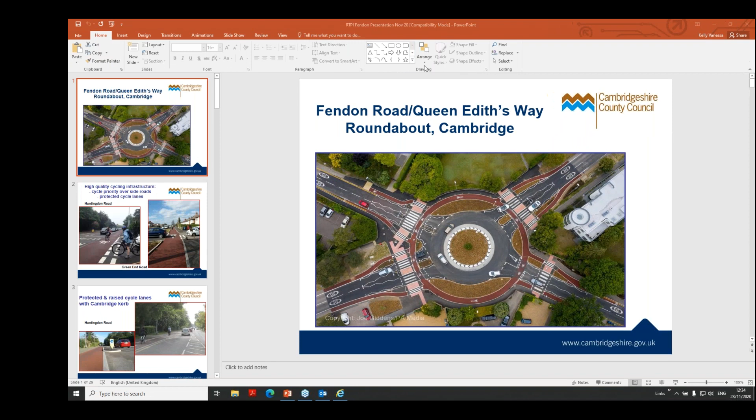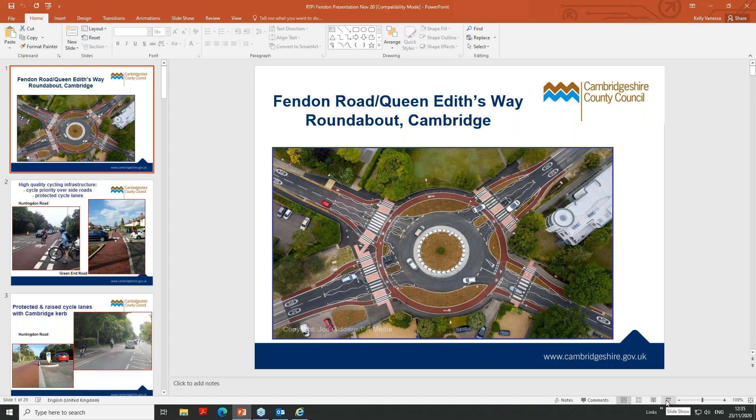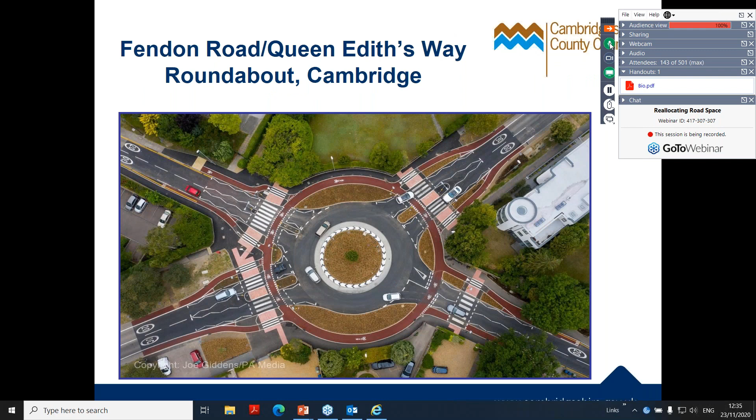Okay, hello everybody. Well, let me just sort out my screen. It's not happening. Let me just, sorry, be with you in a moment. Right, are we ready to go? Is everything okay? Yeah, good to go.

Great, okay. Hi, everybody. There's the roundabout, Fendon Road roundabout from the air.

And oh, I don't seem to be able to. Yeah, mine doesn't seem to be working. Sorry. I just thought. Sorry, the slideshow doesn't seem to be working for me. I don't know why it isn't working. If you just come out of your presentation, Vanessa, and click back into it, it might help you click through. Okay. Sorry about this. Eating away into the time of the thing. Okay, let me just turn that off for a second. I don't seem to be able to get out of it now. So basically everything's frozen for me. Okay.

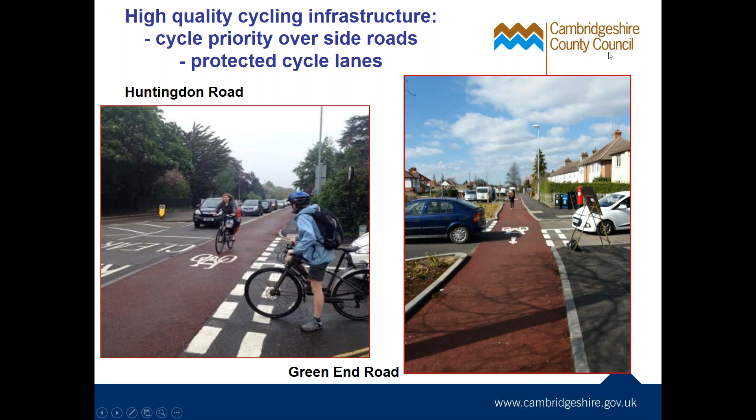Okay, I seem to have got on to the next. I think I'm having problems with my laptop freezing, which is to be expected since it's a bit of council rubbish. I'll try and get going now, okay? Hopefully it'll ease up now.

I wanted to give you a bit of background to the infrastructure we've been delivering in Cambridge. So in 2013, the cycling projects team received Cycle City Ambition funding, got two tranches of it. The funding was conditional on delivering high quality cycling infrastructure and monitoring the schemes before and after. And then in 2015, working for the Greater Cambridge Partnership, we received further funding to improve key commuter routes. You can see examples of this on the screen at the moment.

So cycle priority over side roads, and also separating cyclists from the carriageway, either fully where there was the width to do so, which we had on Green End Road on the right there, or by height when widths were constrained and we raised the cycle lane.

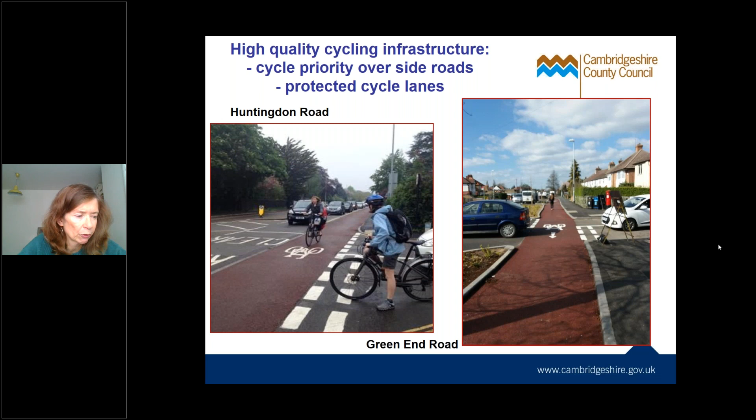Okay, it's working now, good.

So we saw this new funding as an opportunity to be innovative, and the team leader, Grant Weller, and I came up with new designs for curbs. So we used these on Huntingdon Road initially. You can see the Cambridge kerb on the left there, which is a sort of sloping curb that cyclists can leave and enter the cycle lane when they want to. And that's an example of it there on the right on Huntingdon Road.

Advanced cycle green signals were something that came pretty early to Cambridge. We've got them at a number of junctions. And we also introduced side-by-side cycle symbols. So it indicates to cyclists when it's safe to overtake, but also you can ride side-by-side because cycling should be a sociable activity.

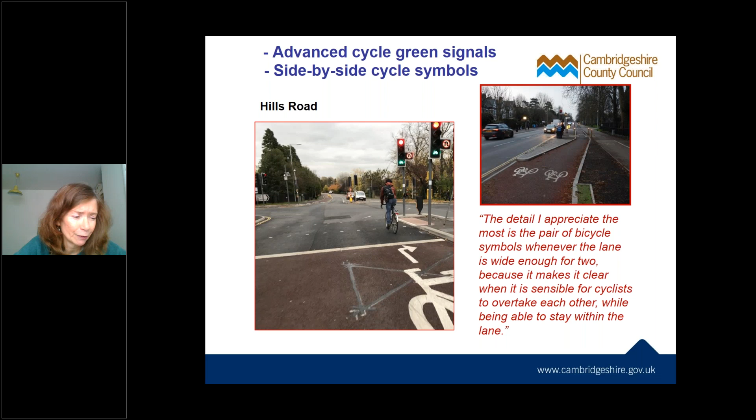And in 2014, the Cycling Projects team delivered a sort of Dutch light roundabout. So it's got the same deflection for drivers as they go around the roundabout. You've really got to slow down, narrow carriageway. But instead of having proper crossings, there are uncontrolled crossing points from shared use paths. So that's not as the Dutch would do it. But as we've seen, this design has certainly reduced accidents quite a bit.

So all in all, we feel that the changes that we've brought about in Cambridge in recent years, the reallocation of road space, for example, on Hills Road, one of the big arterial routes in and out of the city, you've now got 3-metre wide traffic lanes and 2.3-metre wide cycle lanes. So drivers have got to adjust to a different streetscape, one where they have to be more cautious because they don't have a nice wide road to drive along. And it was all these things building up that made us think, well, maybe now is the time for a Dutch style roundabout.

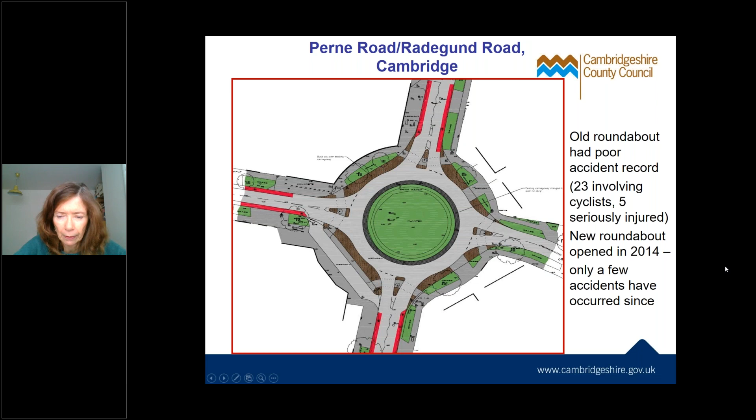Oh look, it's frozen again. Oh, good. Good. Really sorry about this, people. Come on. Okay. Some miracle that happened.

And the poor provision for pedestrians and cyclists along this road has been a long-standing issue. And so local councillors secured some S106 funding to be allocated to improve the infrastructure along there.

And it's stuck again. Okay.

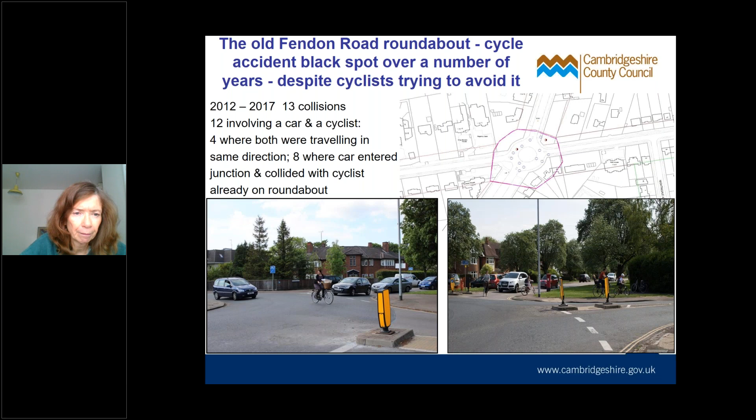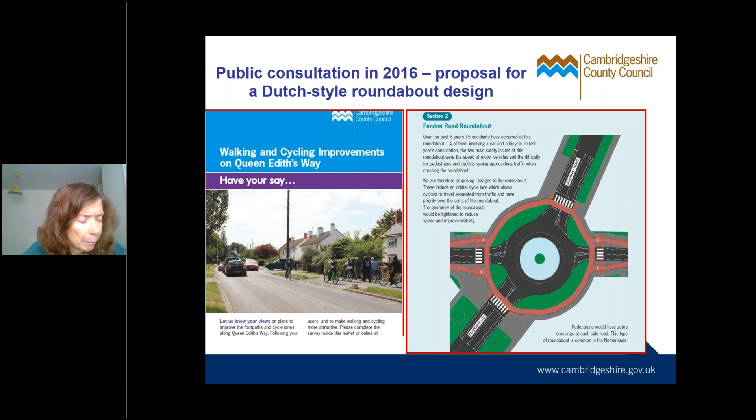So the following year, we had a sort of bigger public consultation with actual proposals. These proposals came out of a stakeholder workshop we'd held in March. And we then proposed the options over the summer. So this is a bit more of a close-up of the consultation drawing. You can see that it's got deflection around the central island, narrow lanes, and an orbital cycle lane. But the cyclists approach each of the crossings at a bit of an angle rather than straight on. So that means they don't have such good visibility of oncoming vehicles. And also on Fendon Road and Mowbray Road, the north and south arms, there's no provision for cyclists exiting, and you don't have islands in the middle of the road either.

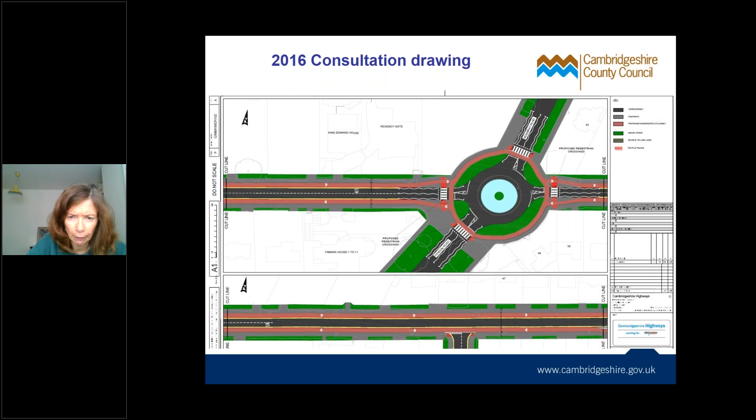So all in all, we got pretty good support for the Dutch style roundabout, with 433 respondents strongly supporting or supporting, as opposed to 115 opposed or strongly opposed. We received approval to move to the detailed design stage and construct the roundabout in November 2016. We've still got some work to do on the rest of Queen Edith's Way. But not long after we got the approval, we were contacted by the Dutch consultancy firm Royal Haskoning. They offered to do the preliminary designs for free in return for some publicity. And it was certainly one of the best decisions we ever made, because we could really draw on a high level of expertise where the design was concerned.

So you can see the changes that they brought about to the design. The cyclists are now approaching each arm straight on. There's greater deflection for vehicles around the central island. There are central islands on Fendon Road and Mowbray. And also on the eastern arm, you can see that they've separated the cycle crossing from the zebra crossing, because there's a private driveway, there's an access between there.

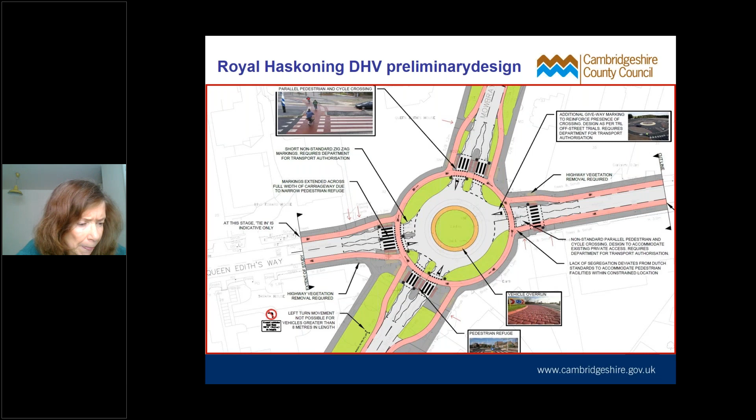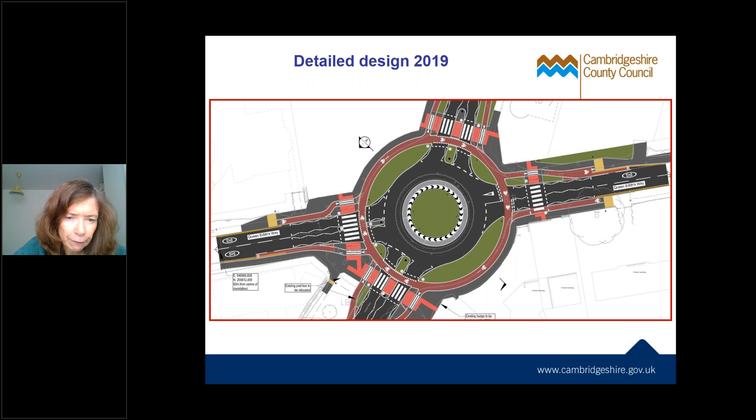So we then moved towards the detailed design, close up of that. And this was refined further by Skanska. And the Department for Transport accepted that we needed to separate the crossing from the cycle crossing on that eastern arm, so that was good. They did let us have give way triangles on every arm apart from that separate one. And we've now introduced mini zebras over the cycle lanes, which was something residents and local councillors certainly wanted us to do.

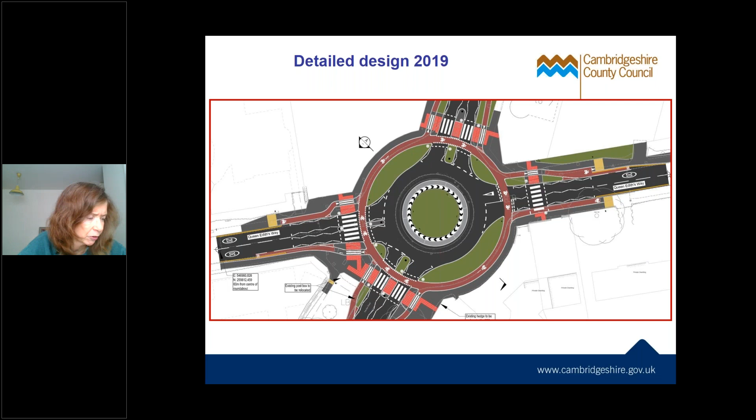When it came to signage, we felt that the signage that we'd had on the parallel crossing on Huntingdon Road was a bit underwhelming. It's legal, but doesn't really stand out. We wanted signage which packed a punch and left drivers in no doubt as to what they were expected to do at this brand new roundabout. We came up with the signage on the right. It took the DfT a long time to come back to us and tell us that basically we couldn't have it. The message shouldn't have been cyclists and pedestrians have priority. It should have been give way to pedestrians and cyclists. And even this was unnecessary, because that apparently is what parallel crossings mean, even if drivers aren't actually aware of it.

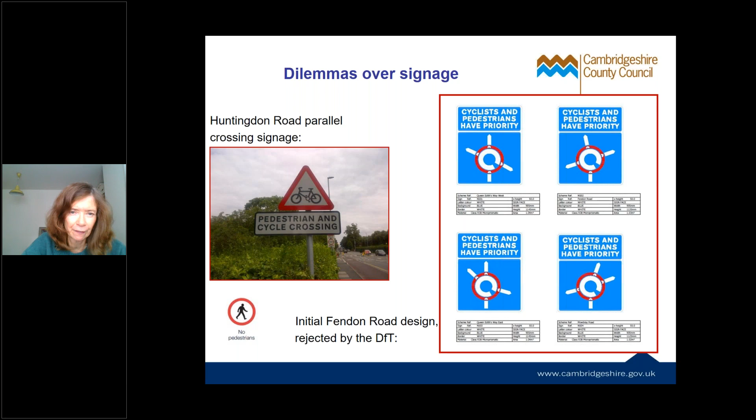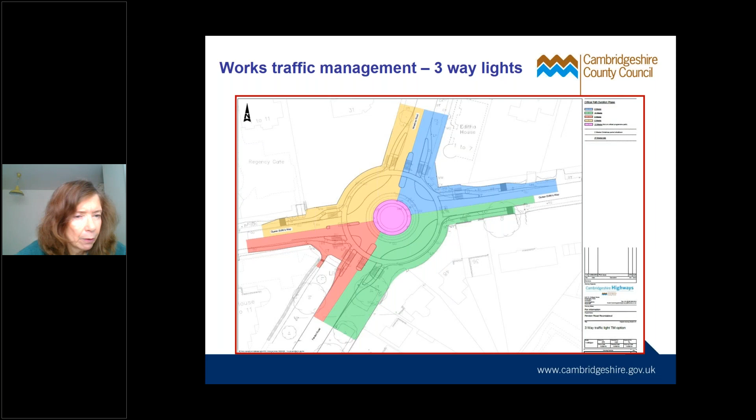So works began on the construction in September 2019. The works were carried out in quarters, as you can see there, and the west arm of Queen Edith's Way was closed, and then we had 2- or 3-way lights on the other arms. A lot of construction issues. You can see in that photo what we had to face.

We weren't allowed to cut those roots because they belonged to a tree growing in a private garden. There was a proper spaghetti junction of pipes and cables under the roundabout. There's even a military cable which we weren't allowed to know the location of. And a lot of this became obvious once we opened the road up. You know, the trial holes just didn't show the extent of the rerouting and diverting that would be needed.

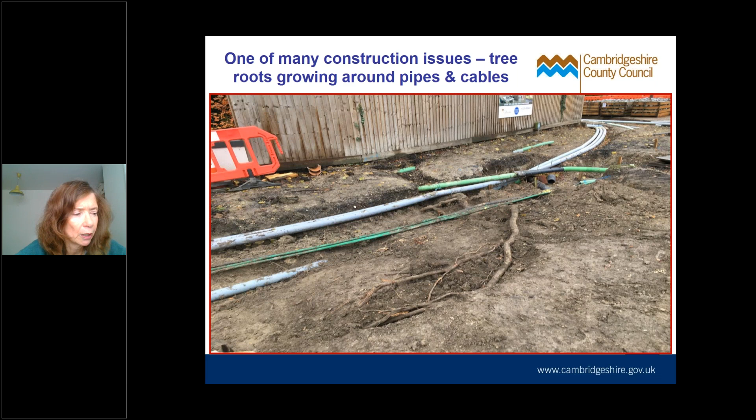In the end, we installed 700 meters of new ducting, and we removed another 200 meters of ducting. Our contractors worked collaboratively with the utility companies on site, but this did impact on the program and the budget. And of course, that first lockdown in the spring, when our contractors did not work for 6 weeks, also obviously affected both the program and the budget.

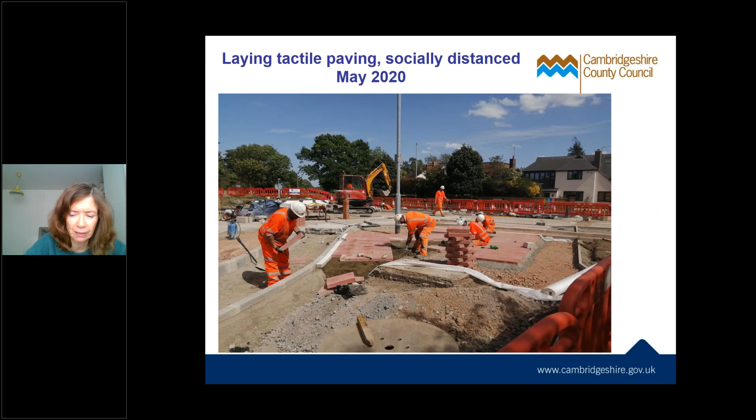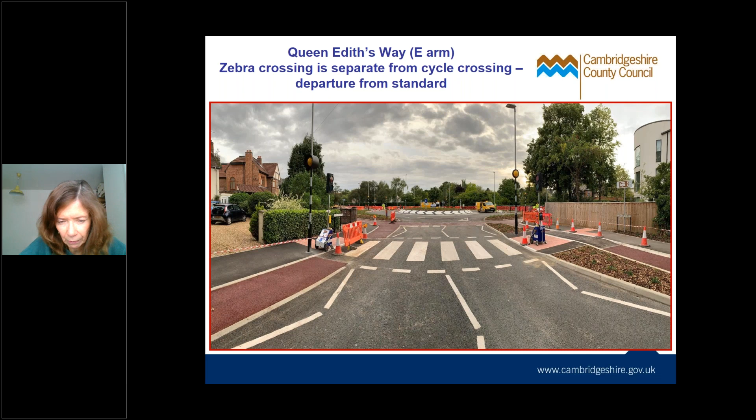But once the utility works were completed, the pace picked up. You can see tactile paving being laid here. And then in late spring, the roundabout was really starting to take shape. You can see the mini zebras there. And then this is the eastern arm with the sort of separate zebra and cycle crossing.

We used a special sort of French gully, which you can see on the right there, which is cycle friendly, good for a constrained location, and should prevent flooding and other issues on the cycle lanes. We reduced the speed limit on the approaches to the roundabout to send a signal to drivers, but unfortunately it was a signal that the night before the official opening, a driver must have missed because he did a hit and run on one of the Belisha beacons.

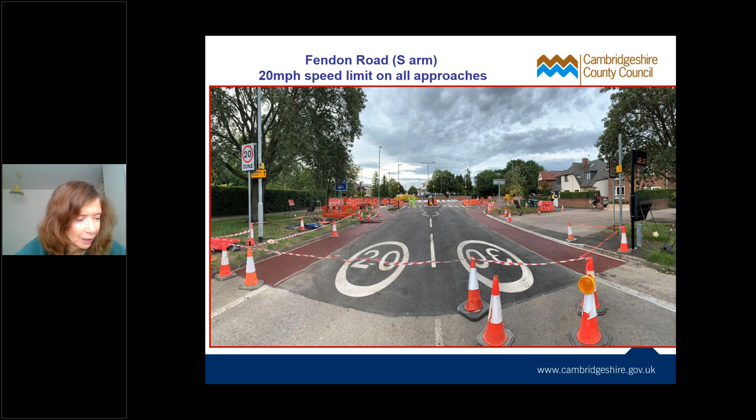So we felt it was really important as we approached the opening of the roundabout to get the message out about how different it was. We produced a video, a safety video that showed how to use the roundabout as a cyclist, a pedestrian and a driver. And the main message was slow down and look out for each other. And in the case of drivers, give way. The video was sent out to everyone we could think of, really, and it was certainly picked up by the local and the national media.

It has been a really difficult scheme to deliver. There was a lot of opposition from a small number of local residents, and their main argument was that evidence from Holland showed that there were more accidents at these roundabouts where cyclists had priority than at those where they didn't. The Dutch acknowledge this, but they argue in favour of cyclist priority because it enables mobility and therefore encourages cycling. And this sort of roundabout design is also much safer than a signalised junction, which does feel counterintuitive, but the Dutch have been replacing signalised junctions with these roundabouts for many years now.

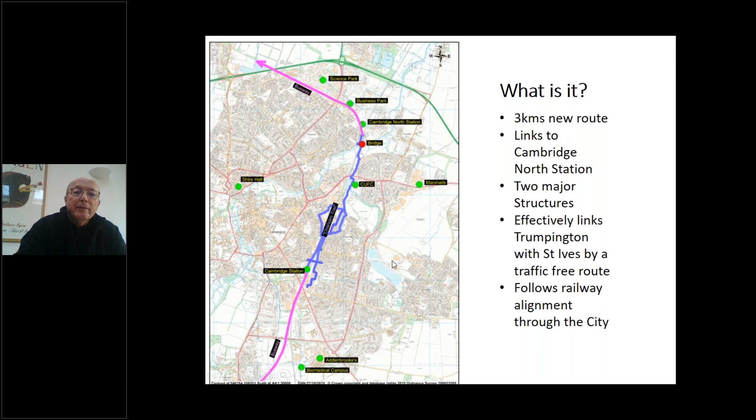In fact, it actually links Trumpington to the south with St Ives in the north, which is about 18 miles. So it's actually a very long strategic route. There's 2 major structures in it, and it follows the railway alignment. I don't know whether you can see my cursor. Anyway, it follows the railway alignment, which is basically north to south.

Something about the history of it. This picture is Jim Chisholm himself. So the name has got nothing to do with cattle droving in the United States. It's named after this chap who dreamt up the scheme perhaps 20 years ago, when he identified an opportunity around the Coldham's Lane railway bridge, which has some spare arches, and he felt that he could drive a traffic-free route for cycling and pedestrians between north and south of Cambridge without interacting with heavy traffic.

It's been widely promoted by the cycling campaign, Cam Cycle, and over the years it's sort of been shoehorned into county policy and found its way into the City Council's local plan and secured funding along the way, and general widespread approval by the public and councillors. So it's actually a very popular scheme, and we've got Jim Chisholm to thank for it.

But why are we doing it? There's an element of because we can. There's opportunities along the railway, the axis of the railway corridor. There's space, there's a bridge that we can use, spare arches.

But the driver really is the fantastic amount of growth that's going on in Cambridge, generally Greater Cambridge, where you've got new developments of housing to the north, you've got large employers to the south, and it's about getting people to their places of work and education in a car-free way. And like I say, it's because we can. We don't want them in their cars. They already use a bicycle, and we want to encourage that some more.

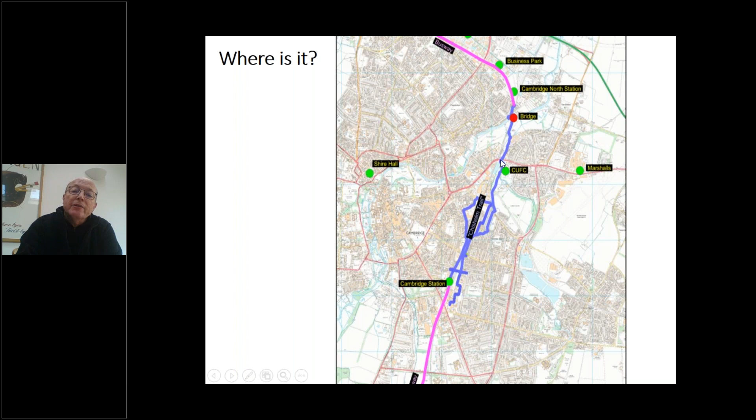Phase 1 is mostly off-road. So this here is through meadowland, and this here is again a sort of secluded green space and a common here where there's a path through it. Like I say, this is largely through areas of housing and on highway. So this bit required planning consent, and this bit very largely doesn't, because it's on highway or the subject of planning applications by Network Rail, and I'll come on to that in a little bit too.

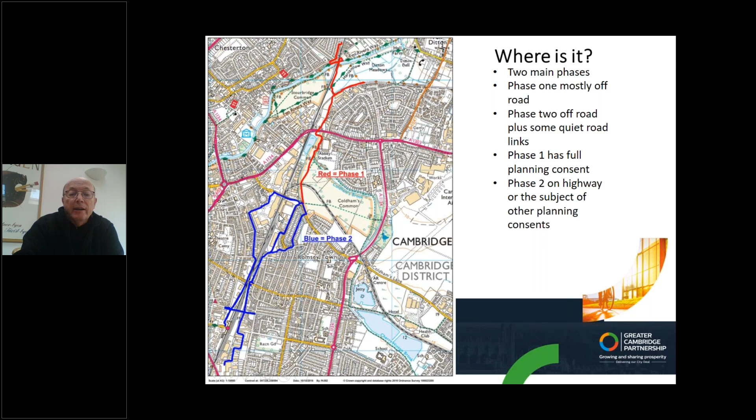So obviously with a scheme like this, what's involved? Clearly a lot of civil engineering. We've got 2 major structures, which I'm going to show you in a bit. Consultation is involved. I think at the last count there were 16 rounds of consultation that we did, which ranged from exhibitions to local liaison fora that we used to run, where we brought interested parties in to give us a hard time through the planning stage, and so they felt that they were involved and had a sense of ownership. We had to go through planning consent, as you might expect.

Because we're going through a common, we had to have Secretary of State approval with Commons consent, and that brings its own challenges. Environment Agency consent, because it's in a floodplain. We crossed the river, so you need a bridge navigation order. Parts of it had to be CPO'd. I have to say not so very much, but we did have to CPO some land to enable the route. And we're adjacent to the railway or within the railway in a lot of it. So there's a whole raft of procedures you have to go through with Network Rail to be able to construct something on their land. I include the train operating companies in that. 15 landowners we had to make deals with to get the route.

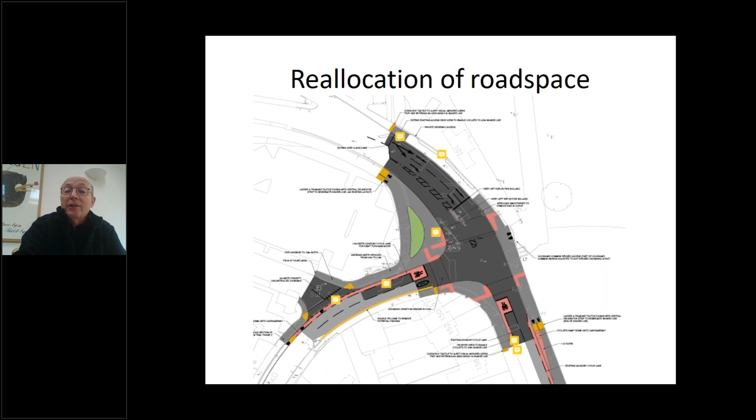So we've taken away from motor vehicles and given back to pedestrians and cyclists. And that's involved a fairly radical, if you know the setup, rearrangement of what goes on at this particular junction. It's not been built yet. It's one of the next things to do in part of our second phase.

Here, a little bit further down, this is a residential street, but it used to serve a very large builders merchants, which is now being redeveloped for housing, even as we speak. There are cranes on the horizon that I can see when I look out of my window. And so when it was in business as a builder's merchant, this road had a lot of heavy goods vehicles going through it. Now it's being redeveloped for housing.

Now we have the opportunity to reallocate the road space in this road, and we'll be narrowing down the carriageway by moving out the curb line and building a 3.5 metre wide path along this axis here. So all this is being taken out, and the new curb line will be here, because it doesn't have to be anything like as wide as it currently is.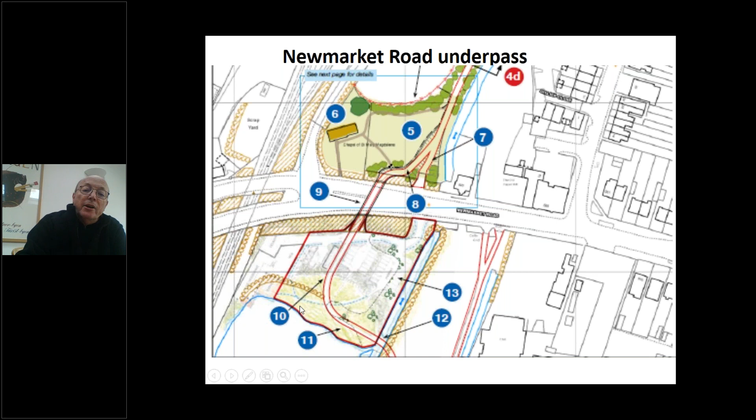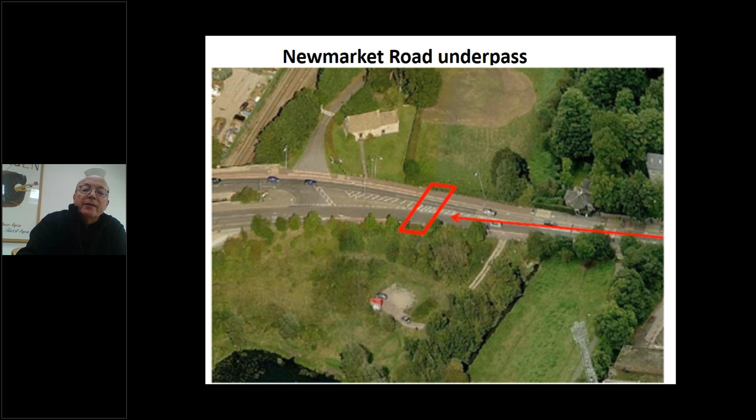Newmarket Road is where we're putting an underpass, just to show you this. On the screen where the 6 is the oldest building in Cambridge, and the red lines show where the Chisholm Trail comes through with an underpass. This is what it looked like before we started work. You can see the Leper Chapel there. This area is a wildlife site and was stuffed with lizards. So that in itself put a huge brake on our being able to work at certain times of year and to have to clear ground and mitigate for the loss of habitat.

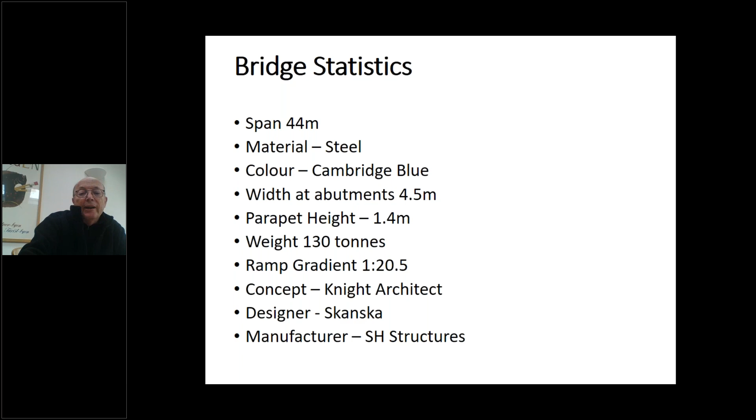We're building a huge bridge. This is some of the stats for the bridge. It's 44 meters long, steel, Cambridge blue. Anyone who lives in Cambridge can go and have a look at it now. It's 4.5 meters wide at its narrowest point, at the abutments. It was a concept design from Knight Architects and made by some very clever people in Yorkshire, SH Structures. There it is, being constructed some time ago now in Sherburn in Elmet by SH.

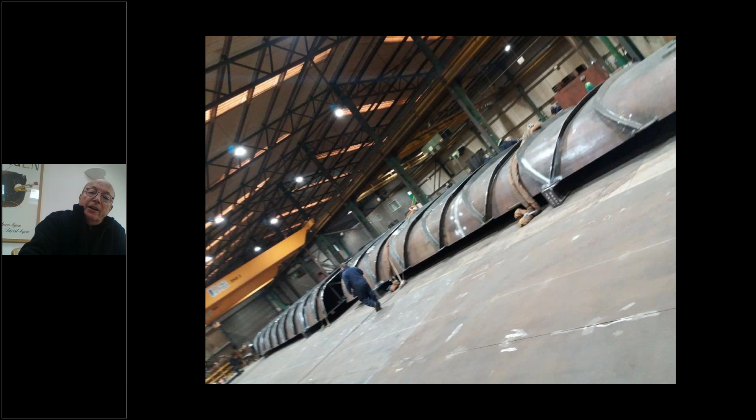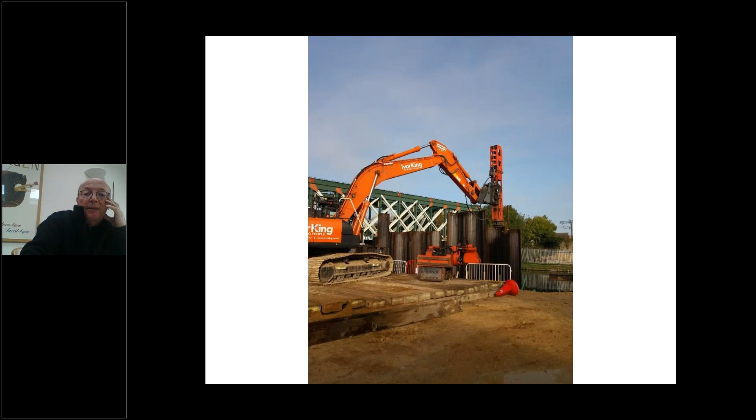And as you can imagine, this is where the bridge is going, and we had to do some quite substantial groundworks before the bridge got put in. Here, these sheet piles support the riverbank. Some of those are 18 meters long because the ground is actually quite similar to porridge in terms of strength. And there is the bridge actually being lifted in. So that's what it looks like. As you can imagine, it weighs 130 tons, so you need some fairly chunky cables to be able to lift it.

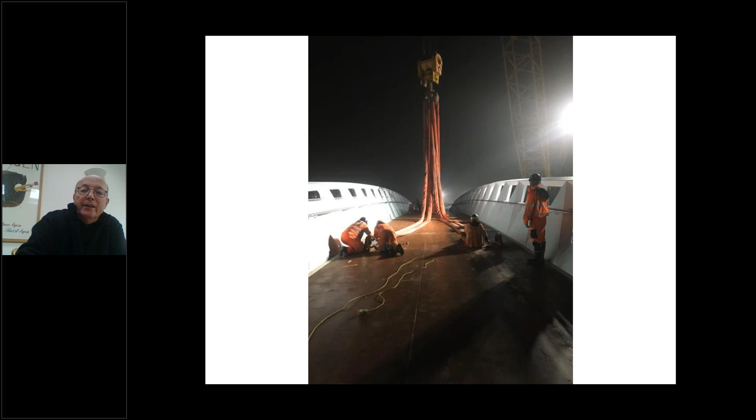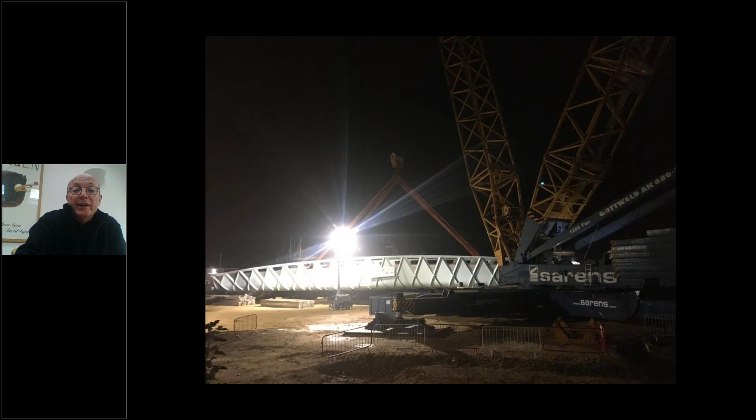And this was happening just a little over a week ago now. This is it being lifted by what is the largest mobile crane in the UK. It's a 1,200 ton crane. It sits on its own piled foundation there, despite being a mobile crane. And there it is, installed in situ, and that's been there now for a little over a week. Broadly, it's been well received by the public. So everyone's itching to use it.

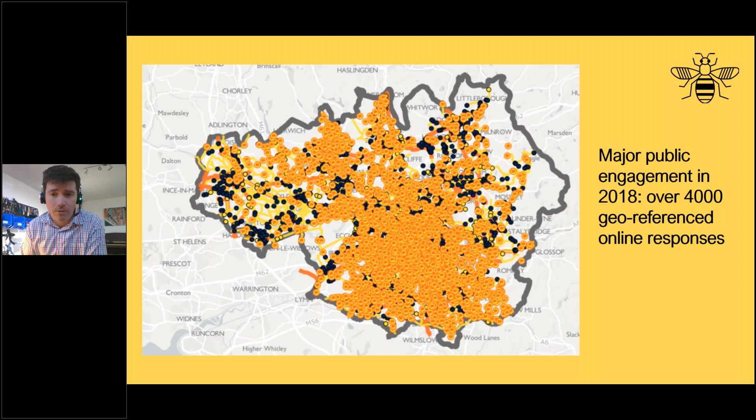And we then pulled all that together and then issued a second version of the Bee Network, taking all that into account in the summer of 2019. And there's some stats there of how big it is, which I won't go into now because I know we're a little short of time.

And I quite like this quote from our Commissioner, Chris Boardman, that at the stage where we were putting this together, it was about what's needed, not about what's possible. We were very clear that the possible bit was our job later. What we wanted to get out of this was what was needed in terms of a network to get people walking and cycling. And the possible bit would come later.

And then in terms of delivery and what it's going to look like on the ground, we've earmarked three main types of infrastructure. And the majority of the network will be on existing quiet streets, or indeed traffic-free routes, generally less than 4,000 vehicles a day, and joining up the crossing points, which I showed you on the map previously.

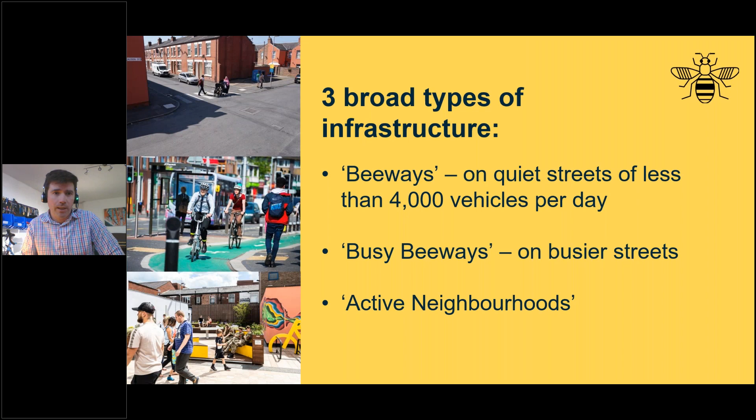A number of busy Beeways will also be in there, which is where a road has greater than 4,000 vehicles a day, and therefore to provide a high quality cycling level of service, you'll need protected infrastructure, as you can see in that picture there in the middle. And then the third type of infrastructure is around active neighbourhoods, low traffic neighbourhoods, perhaps, to give them another name. So I'll tell you a little bit about each of those now, and I'll focus perhaps a little more on the busy Beeways, just because of the focus on road space reallocation of this session.

So on quiet streets, the concept here really is that the majority of streets in Greater Manchester look something like this. They're quiet streets. They've got relatively little traffic on, and in theory at least, they represent a reasonably approachable cycling and walking environment. There might be issues like you can see vehicles parked on footways there, lack of pedestrian crossing infrastructure, etc. But on the face of it, there oughtn't to be a great deal to do to get them to work. So the question is, well, why don't they work at the moment?

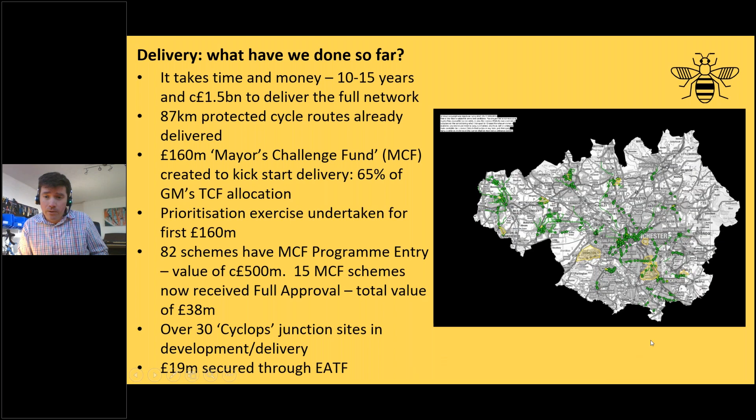And interestingly, we've now got about 30 sites in the pipeline for Cyclops sites, and 19 million secured through EATF as of the announcement last week, which is enabling us to accelerate delivery on substantial sections of the network using temporary or semi-permanent infrastructure like that you can see here.

I suspect I'm probably out of time, so I'll pretty much finish there. I suppose just to go back to that Chris Boardman quote and slightly modify it. We now know what's needed, and the challenge now is to make it possible. And I think the Cyclops is a key tool in enabling that. Thanks very much.

Thanks a lot, Dom. Thanks to Vanessa and Patrick earlier on as well for your presentations. Obviously, it's brilliant to see the variety of solutions that are available and coming to fruition at the moment, from floating bus stops to parallel crossings to full major junction treatments. I won't say too much at this point in summary, because it'd be nice to get a couple of questions in, although we are overrunning a bit.

But first of all, there are a few in. If you'd like to send another one, then we might be able to squeeze it in. The first one was specifically for Vanessa. It's a budget question. Eric Manners is asking, was it really 2.3 million? And would you have any advice for how to help reduce that figure for future projects or similar ones? Yes. I think one of the issues was that we came out initially with a figure of 800,000 before we understood the full scope of the scheme.